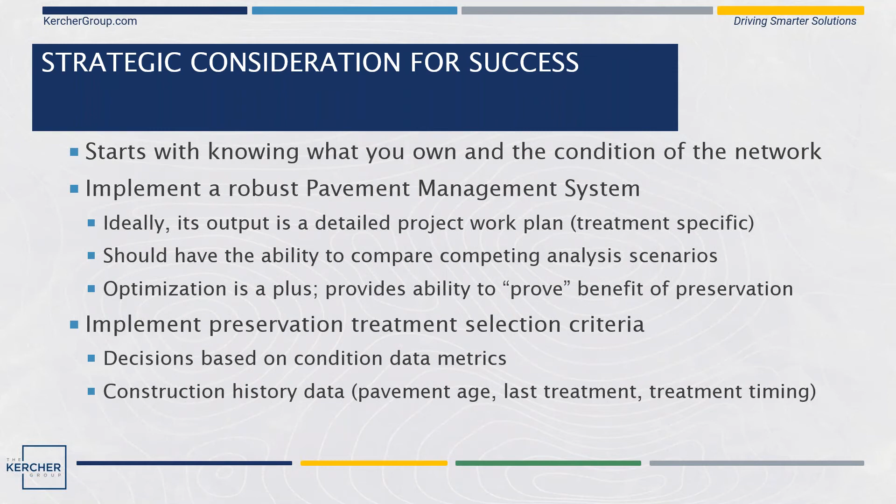So looking at an example from an agency that we work with, I just took a snippet of one of their decision trees, and I wanted to just kind of focus your eye on a few things that they're looking into for making decisions based on condition data. And one is the common one everyone is familiar with, although the actual index itself may be different, but to look into a range of condition index first and decide from there whether we should do the treatment.

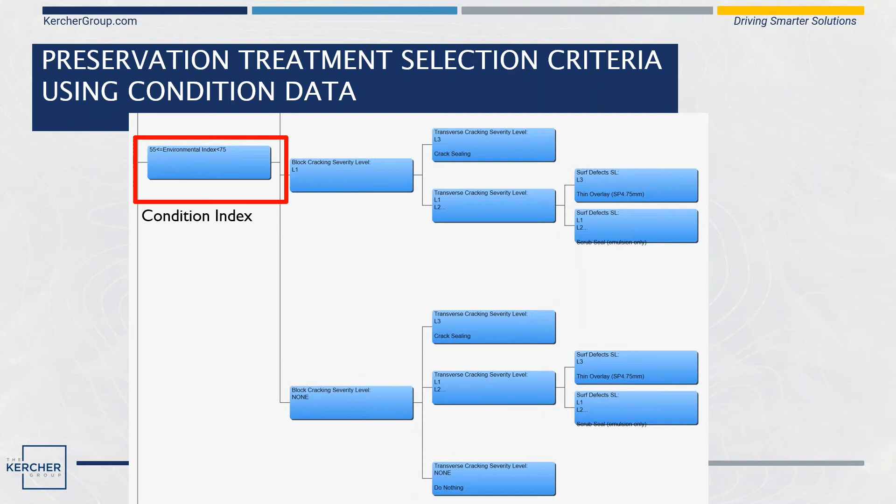You could stop here and then just say, I'll do preservation, and then make it a project level decision of which preservation you do. But if you have the data, you could actually go a level deeper to specific distresses, looking at severity levels of those distresses and deciding from there which treatments apply best.

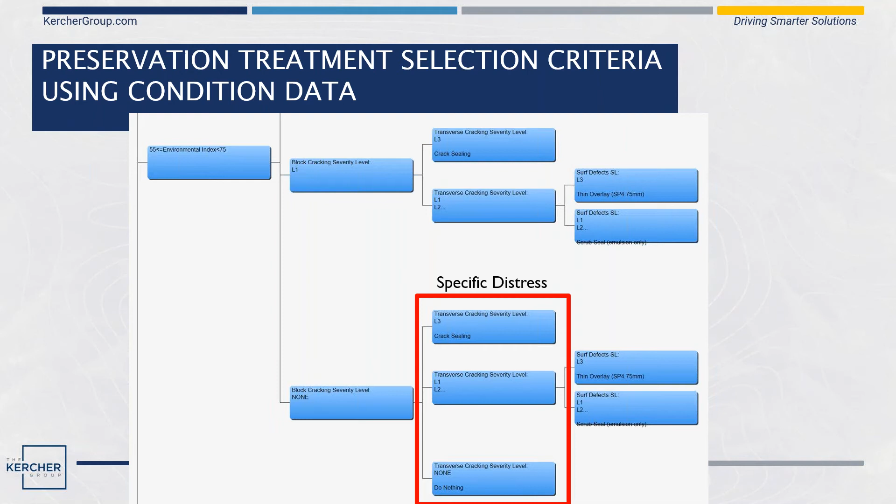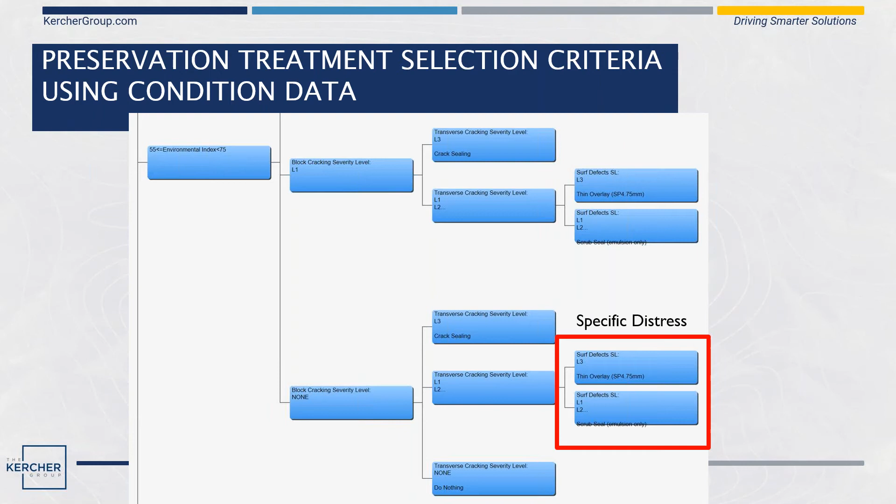And so if I look at a specific distress at this level, and then say I drop to a specific distress at this level, I can see that I'm making decisions on whether or not I should, say, crack seal a roadway. And if I go a level deeper, I can even say whether or not I should do, say, a thin overlay on that roadway, or a scrub seal, or any other type of pavement preservation treatment that you could apply. You could see how this process could be used in your program, depending on the data that you're actually collecting.

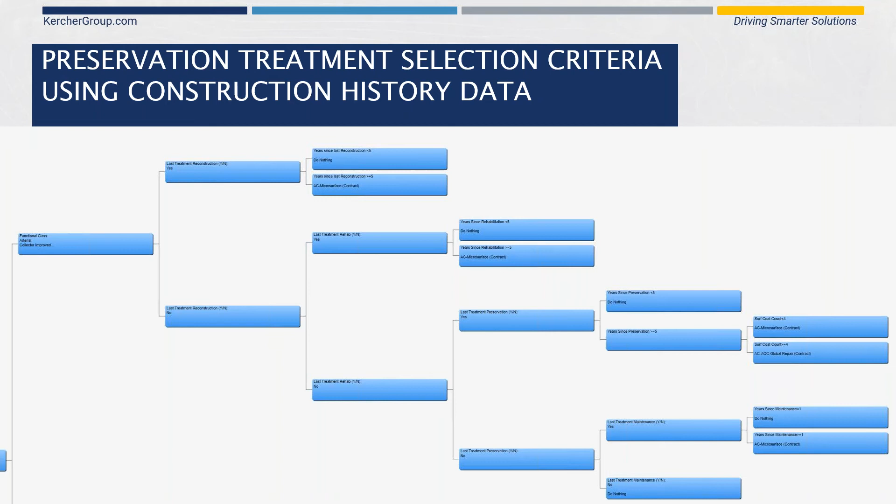This next slide, although I know it's a little small, I'm going to focus your eye a little bit here down the path on construction history data and how we might use that in the decision making. We all understand that construction history data can tend to be a little spotty, but when you do have it, and when you can get that database in good shape, you can make very good decisions out of it for preservation candidate treatments.

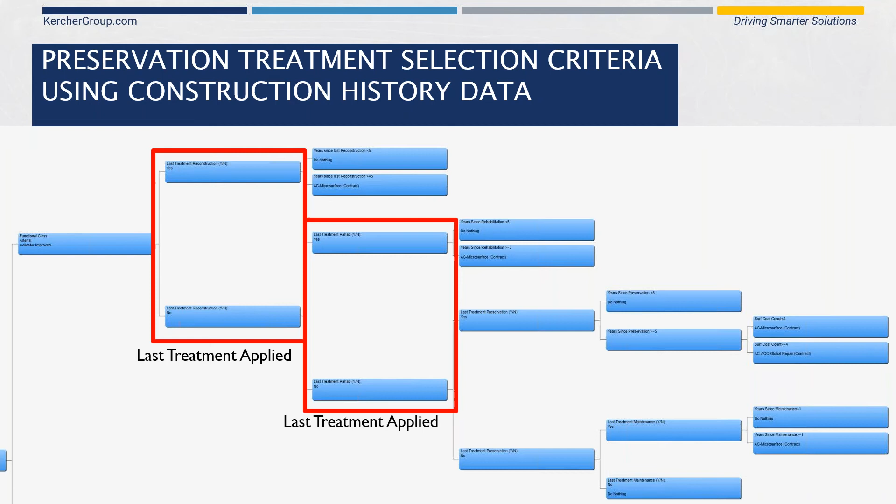A couple things to look at. We could look at the last treatment that was applied. So you could query the database and you could see really just yes, no, was the last treatment a reconstruction or a rehabilitation? So in other words, is the surface asphalt, or does it have anything applied to it currently? If the answer to that is yes, then it may become a preservation candidate moving forward.

So then you might look into the years since that treatment was applied, and then decide from there whether a treatment is applicable or not based on a counting of years in your analysis to see if you've hit that point in time where it's optimal to do a certain type of treatment.

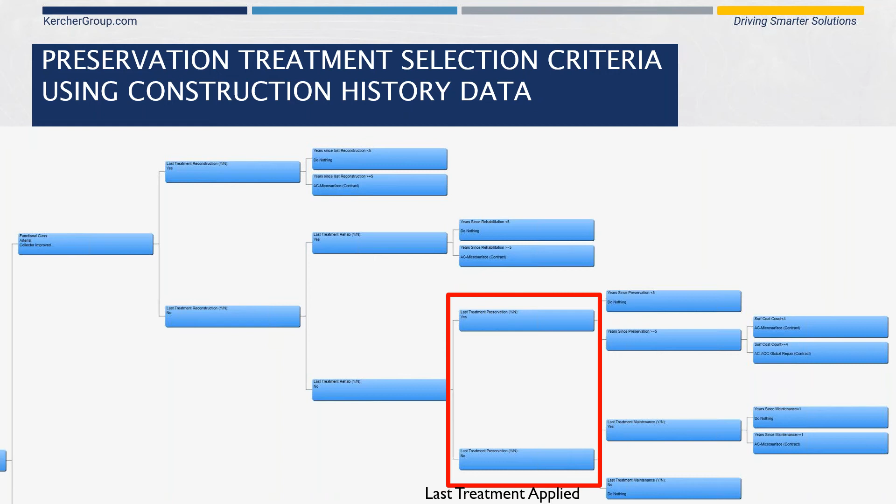I could also go a level deeper down here where I look at the last treatment may have been a preservation that was applied, and I'm now trying to determine whether or not the next treatment that I apply would be appropriate or not based on the last preservation treatment that I've applied.

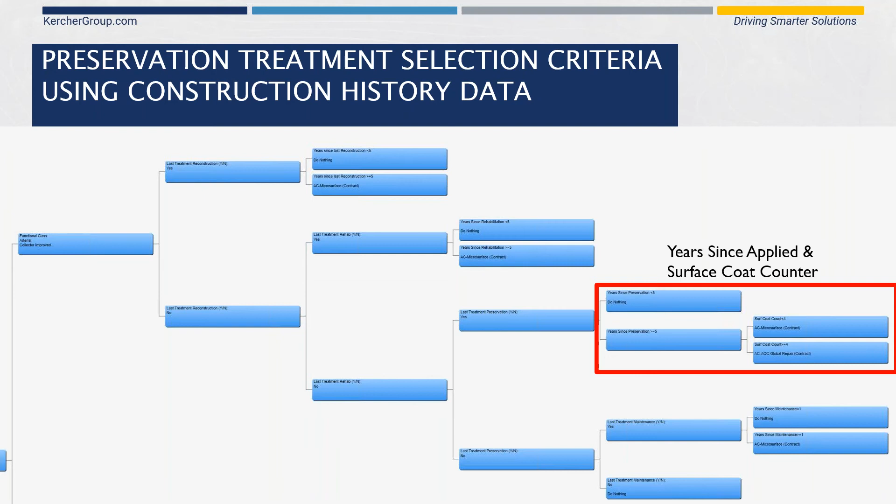And in this case, this agency is looking into not just the years since the preservation was applied, but how many consecutive surface coat counts are there on that roadway to say whether or not they should, say, mill off and start over. If they're building up their section a little bit, the common thing that we see is, if there's a curb, if it's a closed section, you may want to mill off if you get to a certain amount because you don't want to lose curb reveal over consecutive counts. And different agencies have different rules on this, but ultimately you could set those kinds of things up in your decision tree if you have the data to support it.

Speaking of optimization, I was talking about this a little bit earlier. I want to talk a little bit about what is benefit, and what it is about optimization that makes this process very useful when we look at where preservation sits in your program. And so I'm going to start with a very, very simple example. I have a before and an after picture here of a poor condition roadway and a good condition roadway.

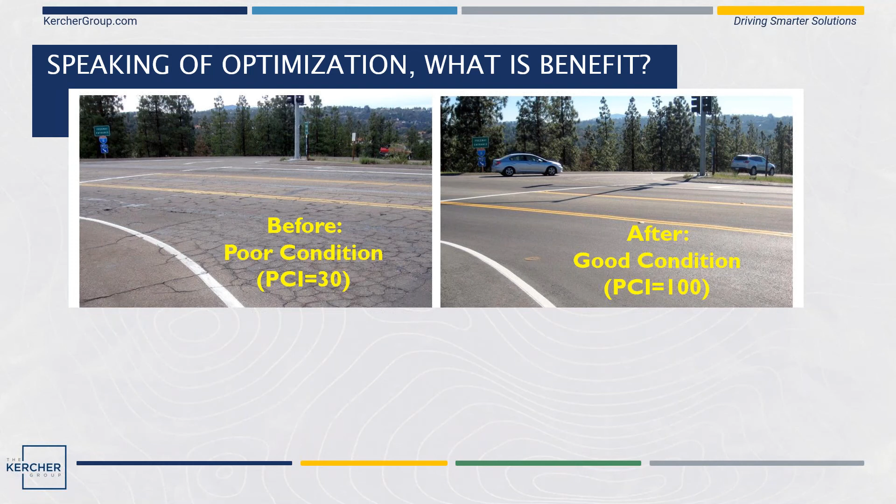If you consider that essentially after treatment on that roadway, you get a condition score bump by a certain amount. So it goes from a 30 to 100, I get a 70-point PCI increase. And then I expect that treatment to perform or last, say, 20 years. For all intents and purposes, benefit is the computation of condition improvement times life extension.

And so that's a two-dimensional way of looking at benefit, more so than just looking at the remaining service life of a pavement, but not just the remaining service life, but also the condition impact of doing that treatment. Now, I understand this is for a reconstruction or a major rehab type of example, but I'll show you how we compare that to how preservation works.

Let's look at this a little bit more from an engineering standpoint, the way that we tend to look at these things. You've heard of this idea that once a road is constructed, it's going to deteriorate over years and hit some condition value, and you have to decide along the life of that pavement where you should perform your work. Well, if you wait until the end of life to do the work, yes, you will get that bump.

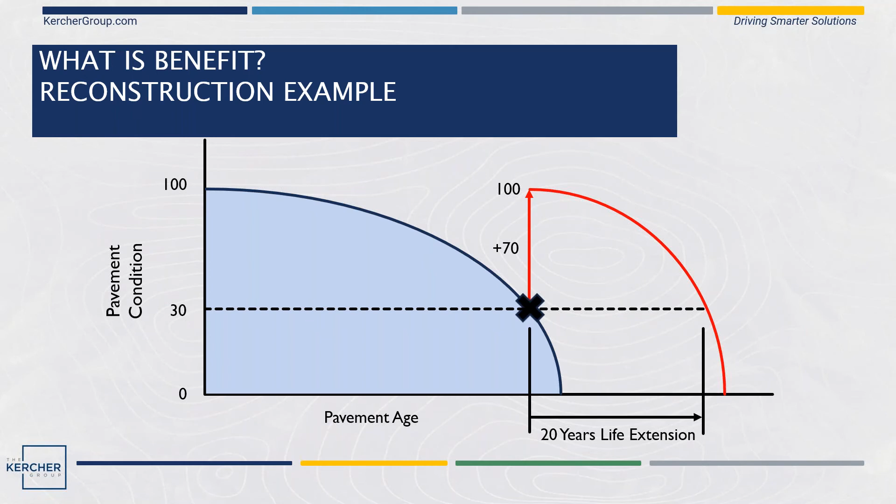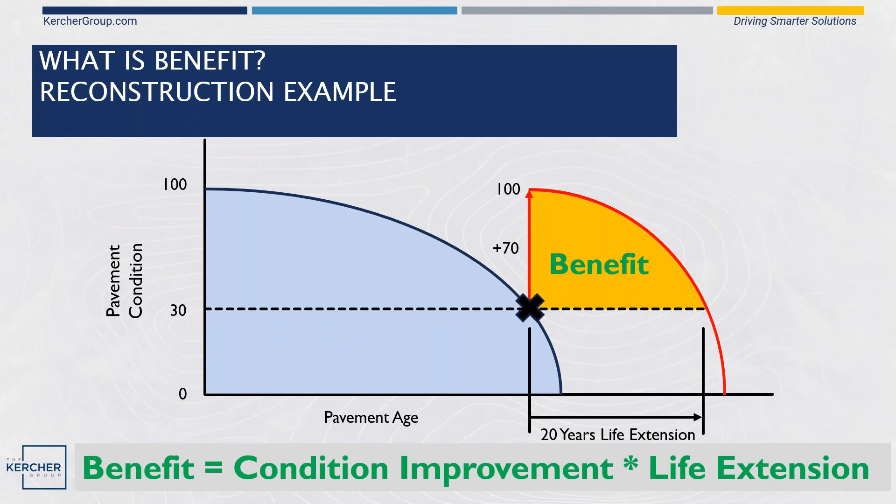You do the major rehab, and then you get that bump back to 100, and that's expected to last some amount of time. Going back to my previous example, add 70 points to the score, get 20 years of life. Benefit is essentially the area under the curve for that treatment. And so when you think of benefit in those terms, let's compare a reconstruction or major rehab example to what that looks like when we do preservation.

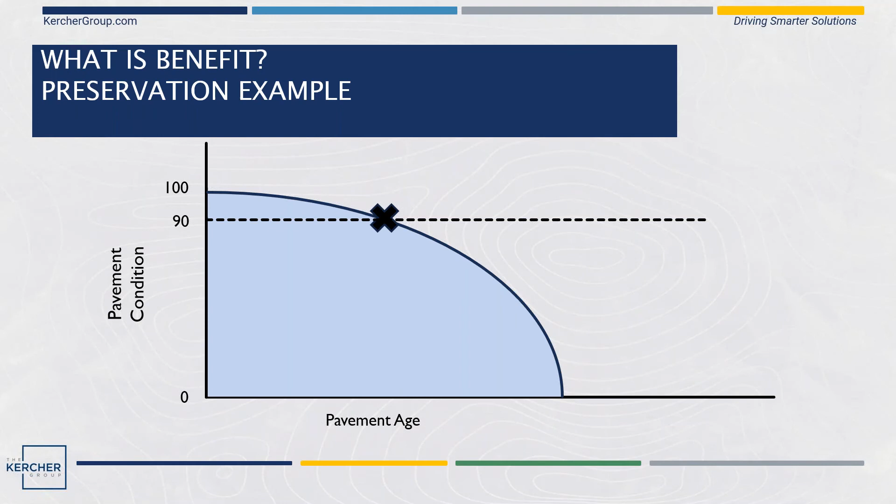If we catch the pavement a little earlier in its life, say around a very high, better condition score, we can look at benefit in terms of life extension, generally with the benefit still being area under the curve through that time period. Now, it's a smaller area.

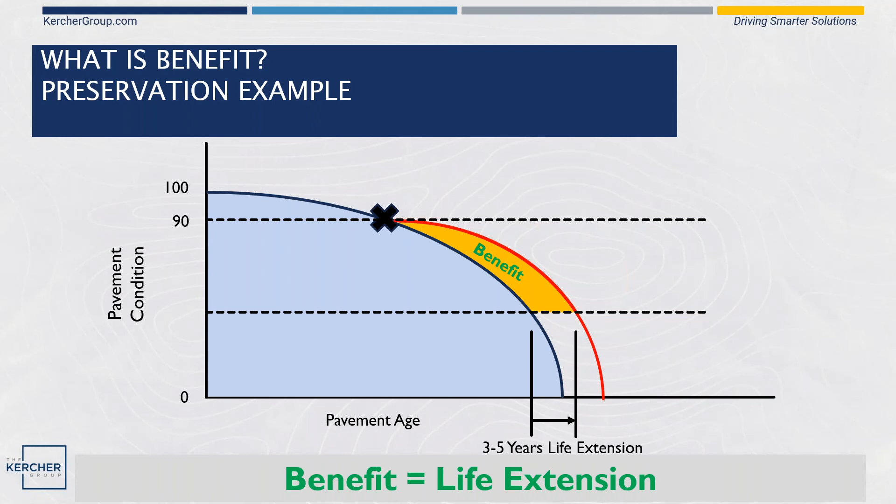Oh, by the way, I also realize that some treatments are not only going to give you life extension, they will give you a minor condition bump as well, because certain distresses tend to go away when you, say, recoat the surface of a pavement. You can likely reset some of the surface distresses like light cracking or oxidation. So we do realize that, but in general, this is a way of thinking about it in terms of life extension, and that can vary based on the treatment applied.

Really, the power of optimization comes into play when I compare the two. When I start to look at the actual benefit area under these curves and the costs of doing the work, the benefit cost ratios suddenly come into focus. This is really the crux of what we're looking at in a pavement management system to determine where and when to trigger certain treatments, what to fund essentially in an analysis.

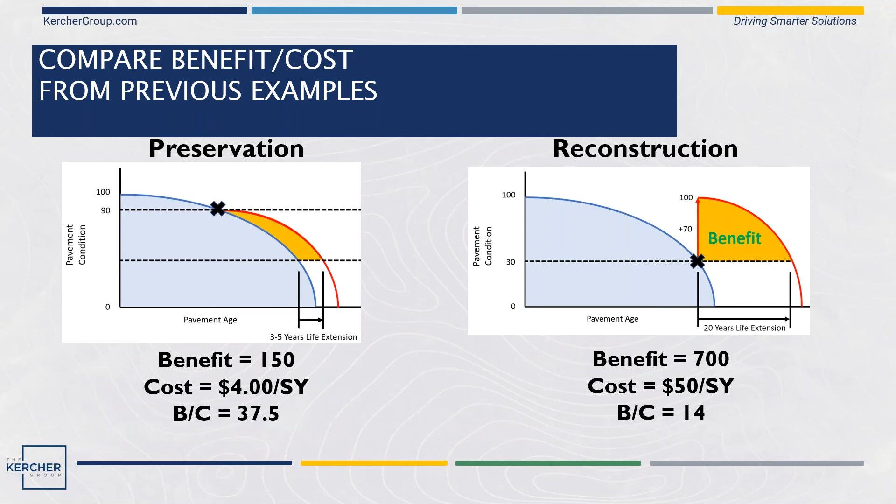Now, these are actual benefit values. I just estimated them as triangles, did 1/2 base times height, and got a value for each benefit. And these are just associated costs for various treatments for certain agencies. But I realize that these can vary based on the treatments you apply and how much work is being done over each one.

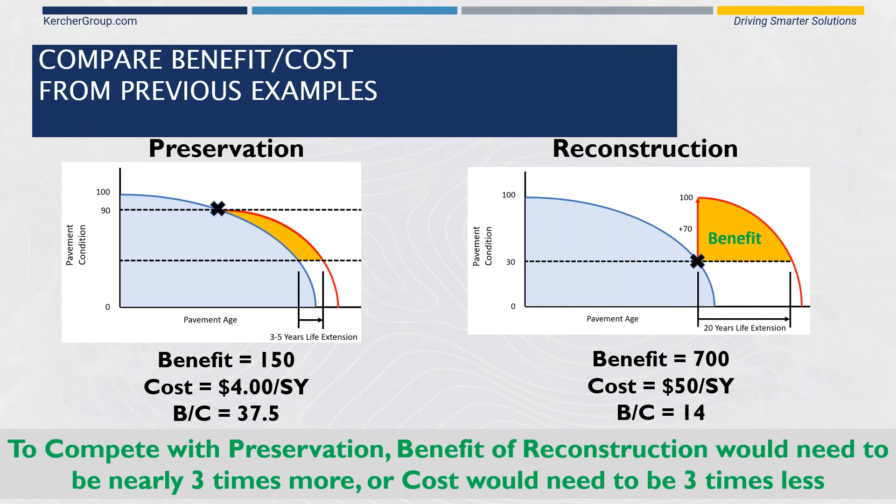But in general, if you look at these two examples that are pretty common, to compete with preservation, the benefit of reconstruction or major rehab would need to be nearly 3 times more, or the cost would need to be 3 times less. And so when you look at those raw values themselves, you can see how in an optimization analysis this can be somewhat of a challenge to manage.

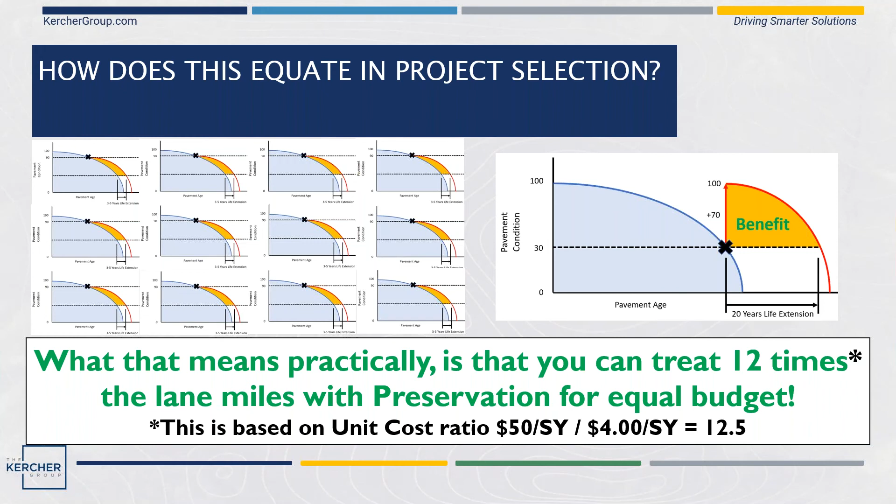What we find is that, with that understanding, we can treat 12 times the lane miles with preservation for the equal budget. Just looking at the ratio of those two unit costs, I get to about 12.5. The implication is that you're touching a lot more lane miles, so you're actually improving the overall condition of the network. However, it doesn't stop there. We know that pure optimization is great in concept. It gives us a great theoretical result, but it can be very difficult to deliver the project work practically.

And that's where we have to then go and interject at a project level to determine exactly what it is we're going to do, and also to apply certain constraints to our analysis to try to better improve our output from the analysis. And so, as I say here, it has limitations for practical application for project work planning, even though it is the quantified best use of funds.

So what are the other things that we really need to consider beyond just pure optimization of our budgets? Well, those are things that sometimes pavement management systems don't know. And those are the things that you tend to know as an agency. And those are things like contractor availability. Whether or not you even have a contractor that performs that kind of work can really impact your overall program.

Or if you have enough contractors to create competition for competitive pricing, that can be very important for all of this. You also want to make sure that they have the experience to do that type of treatment, and that they have the capacity to meet your needs. And these are the kind of things that you're always keeping in the back of your mind.

Material availability. I mean, certainly there's certain treatment alternatives you might want to try to apply at your agency, but you might not have access to those materials where you are regionally. They may have quality or durability issues depending on what it is you're trying to accomplish. And there might be other factors you might be considering as well that may really limit the scope of what preservation treatments you could apply.

I ran two competing scenarios from an optimization analysis for the Polk County system, Polk County, Florida. One was I did a full optimization with no constraints on project selection. I just let the software decide what preservation candidates to pick anywhere it wants over a 10-year scenario. I determined from there the average yearly lane miles that generally appear to come from that result.

And then I ran a second scenario where I set a constraint on preservation funds to try to achieve that average as best I could to hit those lane mile targets. And it turned out that if I took 10% of the budget and I allocated it specifically for preservation, I got pretty close to my yearly average lane miles.

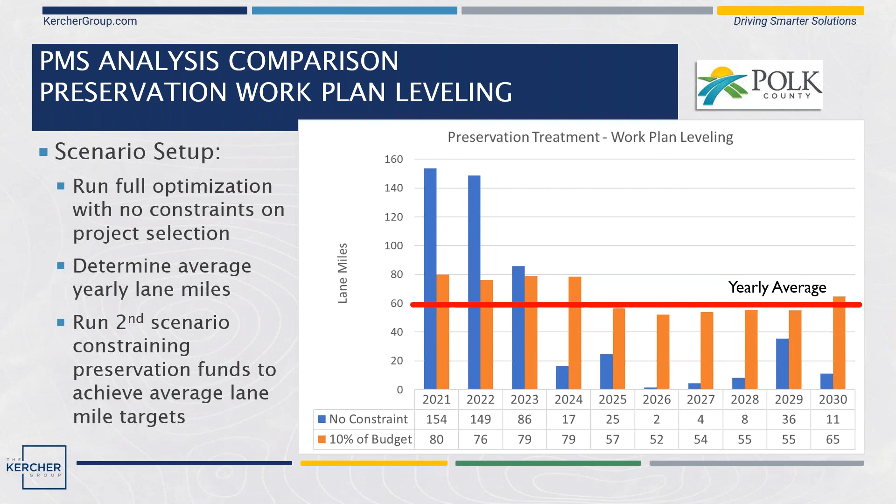This really helps an agency plan better for how they're going to manage the contracts, and it helps the industry understand what they can expect into the future so that they can make the appropriate staffing and equipment purchases and so on.

Another really important issue that's come up quite a bit with some of our client agencies is this need to group projects geographically so that they can get, one, better public acceptance of the work that's being performed, and also they can take advantage of the fact that they're not remobilizing into a location over and over again year over year.

And what we found was that, a lot of times, as you're probably all aware, if you have a pavement management system picking projects, they tend to scattershot those projects all over the network, however best spent the funds. It's not looking geographically, it's just looking for best use of funds. So when you run that initial scenario, you can run it free spend, and that's what I've done here.

And so what we have is a tool called neighborhood grouping analysis, which takes the results of an optimization and then groups out the projects across years and across treatment alternatives to try to better group them into results. And in this scenario, this neighborhood turned out to be a very good candidate for that grouping analysis. And so they all came together into the same year, and it's going to be the same kind of work being performed.

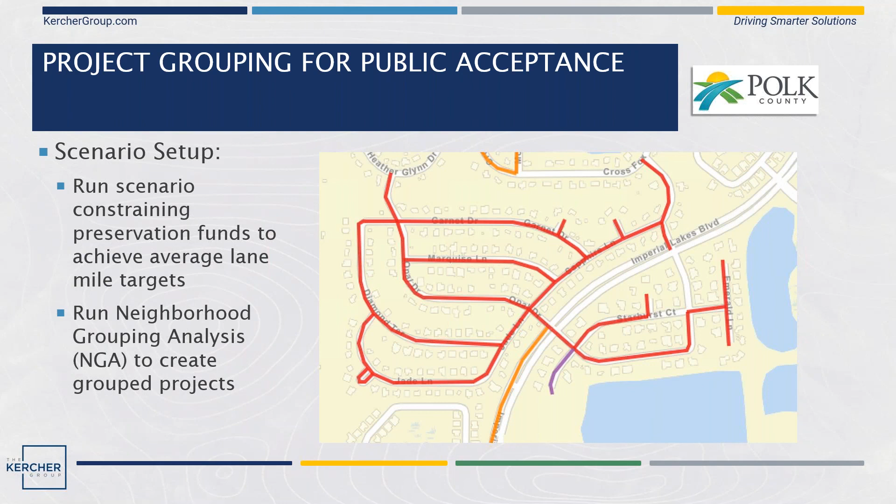At the end of the day, what we realized was that it was important to be able to show that we want to be able to do those things, but we also need to be concerned with what is the impact to the overall network condition having made those kinds of adjustments. And you can imagine if you take a project that was selected in a different year completely and move it up in time to marry it to another project and make a broader project, that's going to have impacts on the overall network condition downstream. And so the timing of all that is very important.

Also, the way you spend the funds can have an impact. So you look back at that leveling example. If I change the optimization to force the funds a certain way, I expect that to be a less optimal result, but a more practical one. The question is what are the impacts? What are the implications? And what we found was that the implications are very minor in these two scenarios.